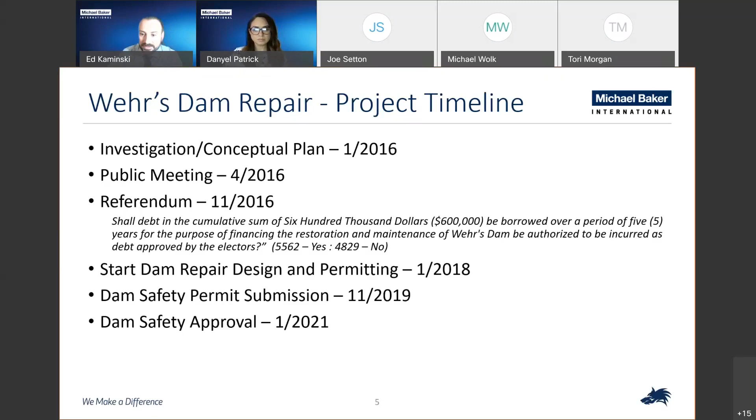The project then progressed into final design. Several more inspections of the dam were prepared, as well as the Pennsylvania Department of Environmental Protection Dam Safety Permit, the permit that is required to authorize repairs being made on the dam. That design began back in January of 2018, ultimately culminated in a submission in November 2019. The review process took several years, but it was approved recently here in January of 2021.

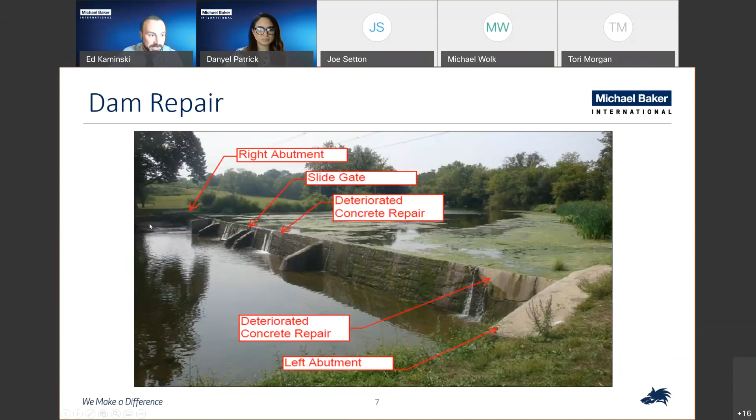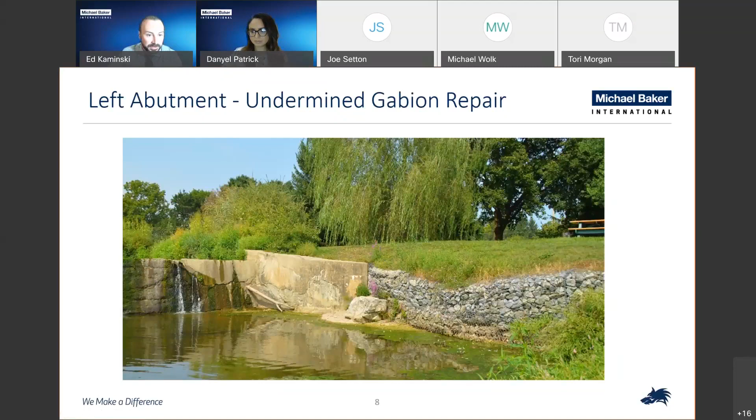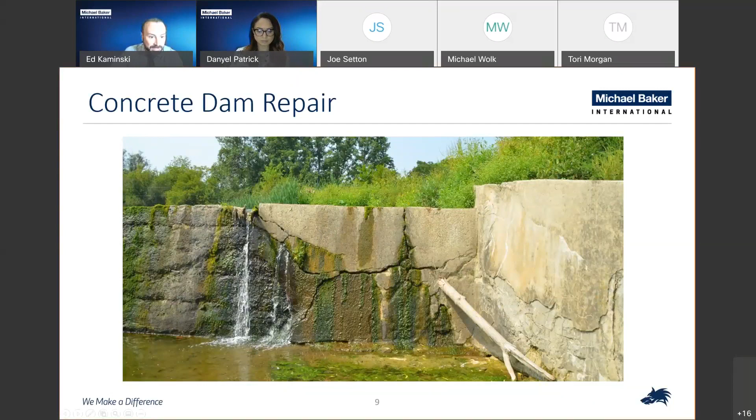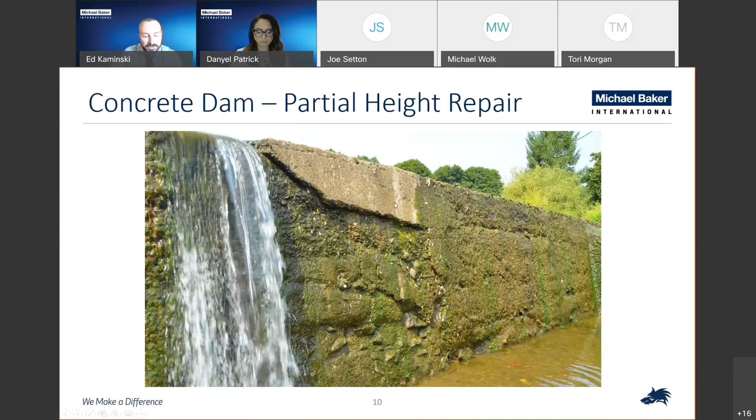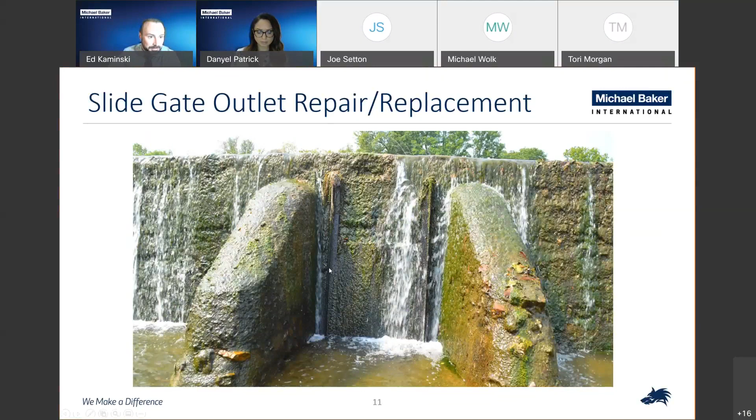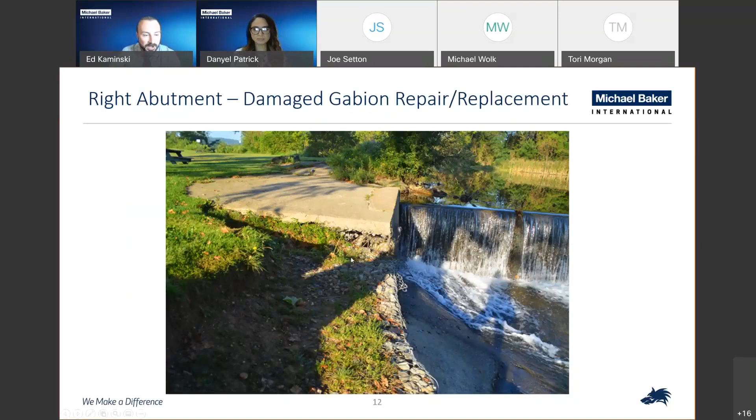The Erosion and Sediment Control Plan permit is focused on preventing sediment from going downstream and contaminating the receiving waters downstream of the construction site. It involves installing fabrics and controls to collect that sediment so it can be removed prior to going downstream.

An additional permit we'll need for this project is the Pennsylvania Fish and Boat Commission Drawdown permit. This is a coordination permit with Pennsylvania Fish and Boat Commission, and it allows for the removal of fish or any other coordination of issues that PFBC might have with respect to this project.

And then finally, the South Whitehall Township floodplain permit. This is the permit that authorizes work within the floodway on the dam itself.

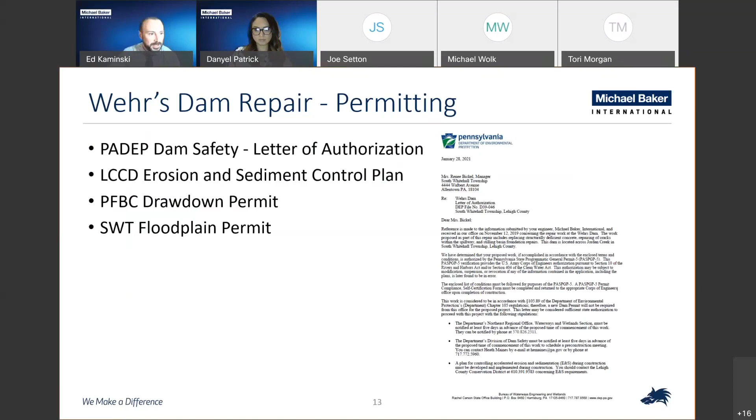So with that said, I have a couple of brief schedule items roughed out here of what's remaining to do on the project. The major three elements are finishing out permits, letting the contract out for bid, and then progressing to construction.

For the remaining permits, all three can be done concurrently. The longest approval would be the erosion sediment control permit, approximately 3 months for review and approval. Additionally, the fish and boat drawdown permit is a little less than that, typically 2 months maximum. And the South Whitehall floodplain permit would be approximately 2 to 3 weeks.

On the heels of that, once we have all the permits approved, all our ducks in a row, we can let the contract out, with typical bid phase to selection of a contractor being approximately 3 months. And then moving on from there, this project, if done in a single phase, would take approximately 12 months, so 1 year.

But in addition to a single phase, there are options for multiple phased approaches. This would give the contractor flexibility to split the repairs up into multiple projects, allowing the ability to reduce costs by targeting the best weather times of the year to perform the work, i.e. July and August, when flows are ideally at their lowest.

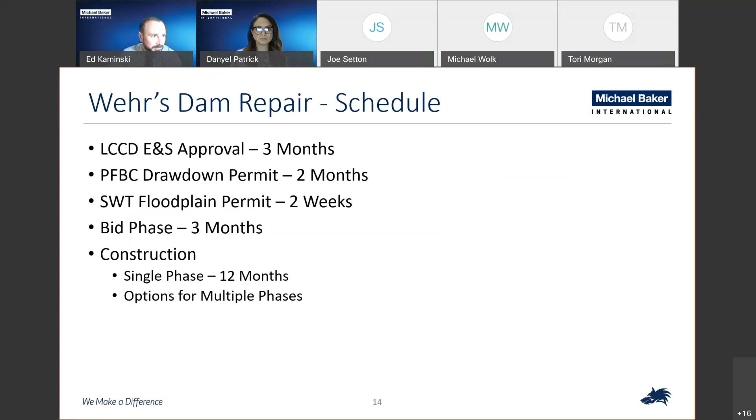So with that said, the referendum targeted a $600,000 estimate to perform the work for the repairs.

Right now, we are estimating a range between $550,000 to $750,000. The main reason for the range is inflation and costs due to the passage of time, since several years have passed since the 2016 estimate.

Additionally, there's been market fluctuation in cost of materials for the dam, one of the primary ones being concrete, which is going to play an important role in this project. And then there's also ancillary impacts due to COVID protocol procedures.

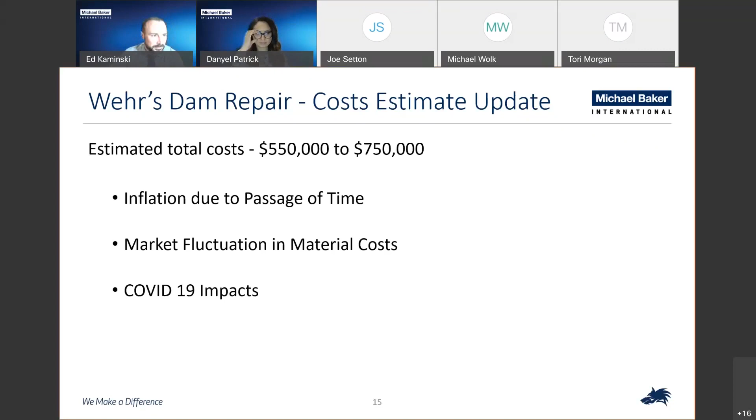So with that said, that's my brief summary of where we are in the project. And I will pass the presentation over to Danyel to go over some of the protocol for opening up the question and comment forum. I look forward to discussing this with you and answering any questions you might have. Thank you.